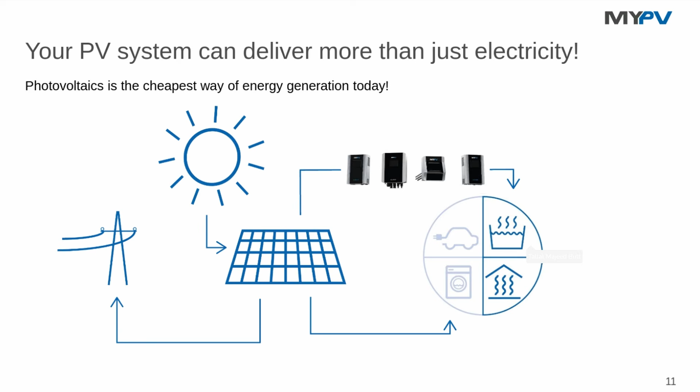For example, you can do domestic hot water, or you can do electrical space heating. So there are different options to use PV in different segments, and that is the topic for today, how you can use PV power for heating applications. So moving further, where is the right choice for my-PV products?

This is a single family home energy chart, which is roughly calculated for European houses. And here is a comparison between old buildings and new buildings. In the new building, the energy demand is relatively equal for each segment, meaning domestic hot water and space heating are roughly equal, because the building itself is a passive building, a low energy building, so it needs low demand for space heating.

So yes, here you can do both applications with my-PV products. You can do electrical space heating, infrared panels, night storage mediums, etc. You can do both domestic hot water as well as space heating.

Then the question comes on the old buildings. In the old buildings, even where I'm living is an old building, your energy demand is really high. In that case, it's only recommended to do domestic hot water with the my-PV solution. Technically you can do space heating, but your power from photovoltaic will never be enough to meet that high demand.

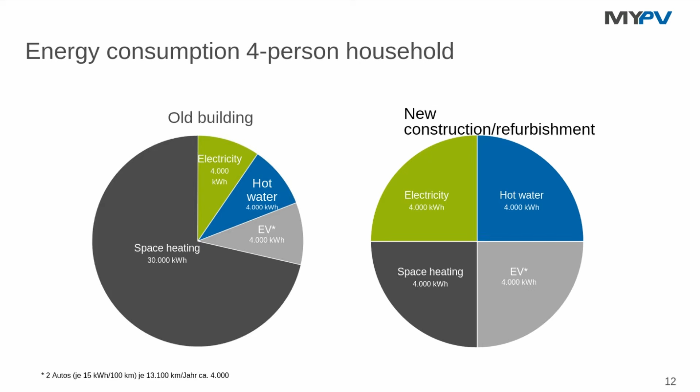So the point from this slide is, in new construction, in modern buildings, you can do both space heating as well as domestic hot water. But in the case of old buildings, it's only recommended to do domestic hot water.

And our concept is pretty simple. When it comes to heating demand, you are always taking external sources: that can be power from the grid, gas, oil, or pellets. What we are saying as a company, as my-PV, is during the day, use as much power from the sun as possible for heating up the water.

And during the night, you can use power from the grid. Even with our devices, you can take power from the grid as well. So there are different options to combine photovoltaic together with grid power and external sources for heating up the water.

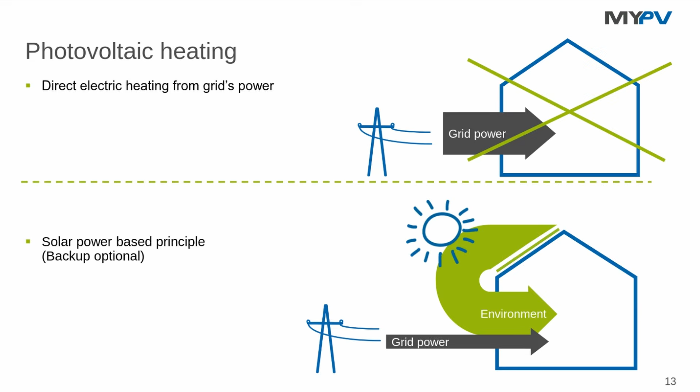When it comes to storage for PV, the number one idea is the battery. With a battery, you can store energy. But comparing it at 5 kilowatt-hours, the battery is still expensive and requires a huge capital cost. What we are saying is that you can store more energy in your boiler, in your tank, in the cylinder of a 300-liter boiler. So you can store more energy at less cost.

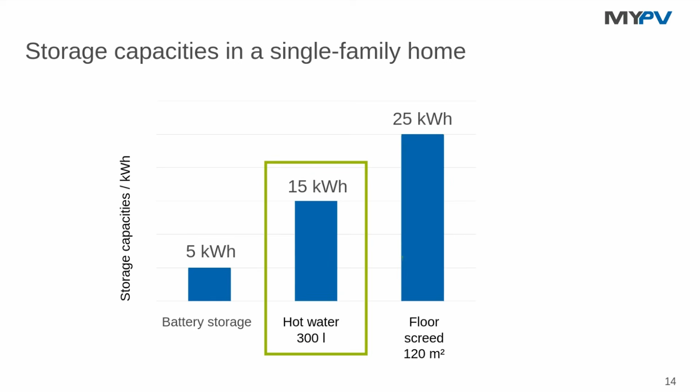So you can store more energy with less investment. But nevertheless, our systems are also compatible with battery storage as well, which we will be explaining in this webinar, as well as with the Loxone system and how it works. So Dennis will also highlight those things as well.

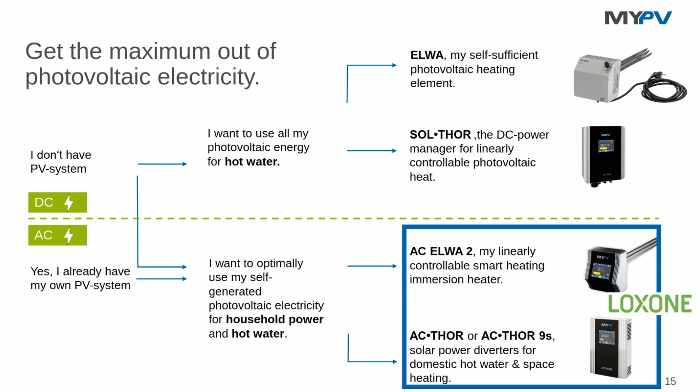So now we discuss which products we will be discussing today in this webinar. We have a relatively small portfolio divided into DC products and AC products. DC products are directly connected with the PV, but those are not the topic for today. Rather, the topic of today is the grid-connected PV system and products that are compatible with the Loxone system, so how our AC products can be integrated together with the Loxone management system. There we have two products which we will be discussing in this webinar today.

So as we are preparing with products, we need to know as a background why to choose MyPV, why you need to do domestic hot water from PV. There are a number of reasons. For example, the hot topic, especially in Belgium, in Flanders, is that when you are exporting your surplus power, you cannot make money out of it. So you have a low feed-in tariff. You are exporting your surplus power and getting nothing from that, so it's rather better to use that power in your house.

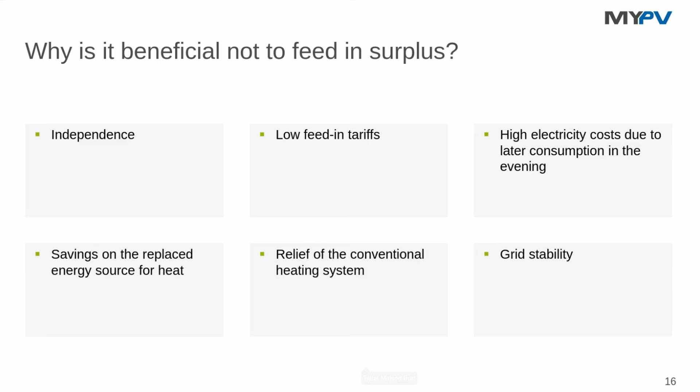Other reasons, for example, in the Netherlands, you have net metering, which is coming to an end. Likewise, you need to pay grid fees as well when you are exporting surplus power above a certain limit, so you need to pay for that surplus power as well. Other reasons: there's more and more PV power in the grid, and that's causing problems for the grid operator. There can also be gas prices, because that was the case, let's say, 2 years ago when gas was quite expensive. That can be a reason to get independent from those sources.

So what is the concept behind MyPV? What are we doing as MyPV? In terms of our products for grid-connected PV systems, you have PV panels, then you have a PV inverter, and that PV inverter is producing the power at the house. You are using that power at the house, and there comes a time when there's excess power. That excess power either goes to the battery, in the case when there's a battery, or otherwise it is sent to the grid.

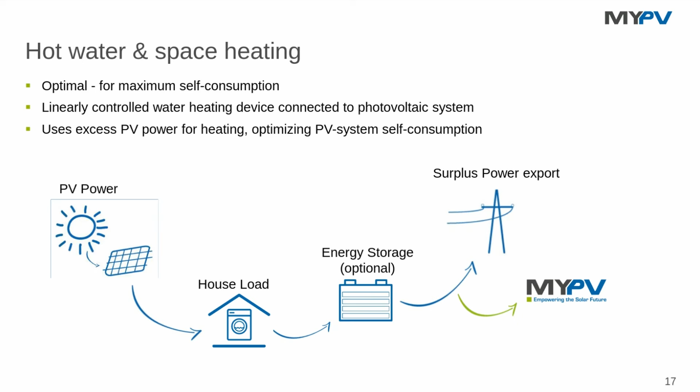What we are doing is reading that surplus power information and diverting that power exactly to heat up the water or heat up the home. That can be a heating application, I would say. So this is the concept: we are using precisely the surplus power which is meant to be exported to the grid. Rather than exporting it to the grid, we are using that power for heating applications. As I said, we have different products for that. We have the AC ELWA 2, we have the AC THOR, but let's start with the AC ELWA 2.

So this is a smart heating element. What it means is that, as I said, you have a PV system, and together with Loxone, we are getting the information about how much surplus power there is. The master of the system is of course Loxone in that case, and we are getting the information about how much surplus power there is.

The story behind our smart heating element is that we are doing linear power control. What it means is that the power at the feeding point is continuously changing because somebody is turning on lights. Even the production from the PV is continuously changing, and we are reacting to that information very precisely. We are reading that information one time per second, so you can imagine how precise we are. And every surplus watt is sent to heat up the water.

So that's a feature which is, I would say, unparalleled, because there are other solutions, clearly, with relays, etc. But we are not doing on and off. Rather, what we are doing is linear power control, which means that we very precisely send that power to heat up the water. And what further comes with the Loxone system: of course, they have their own ecosystem, and we can be inside that ecosystem where Loxone can prioritize the system.

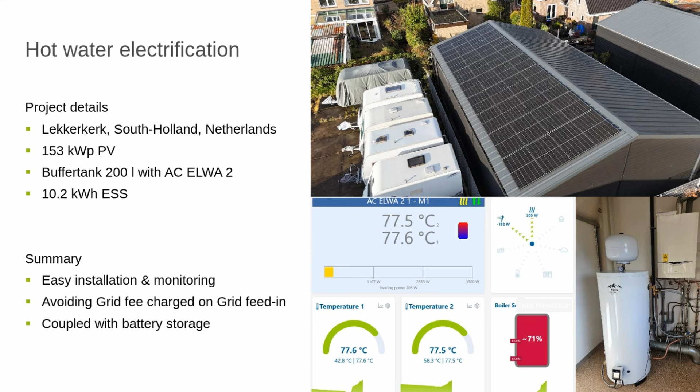What it means is that, because even in his system he has a battery, once the battery is full, then that power is diverted to the 200 liter boiler. So together with that he improves his PV self consumption, and that you can also visualize on the web interface, even on the display as well. So that's just a small reference from the Netherlands, I would say.

Again, some emphasis on PV self-consumption, because this is a relatively important topic in the market, becoming an important topic. The reason, for example, if we are taking a relatively average system of 6 kilowatt, your PV self-consumption is really in the level of let's say 30%, and yes, you can increase your PV self-consumption with a battery, but that comes at a capital cost. What we are saying is that yes, you can increase your PV self-consumption with my PV.

In this black one, you can increase PV self-consumption up to 80% with my PV solution. But nevertheless, our system can also be combined with a battery as well, and you can achieve higher PV self-consumption.

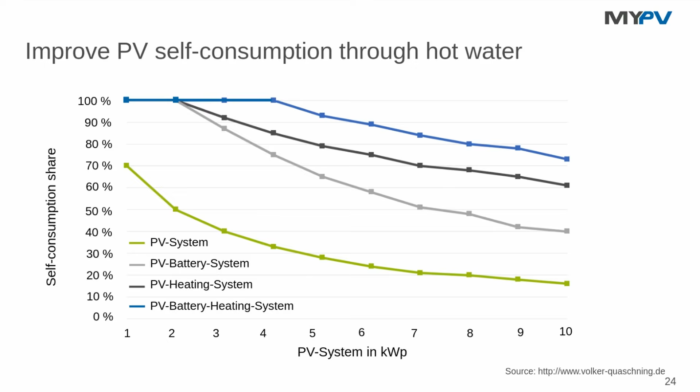How it works with the battery system is that generally our recommendation is, let's take an example of a PV day chart curve. Till afternoon your battery is full, completely full, and then you have surplus power. Once you have surplus power, then we start diverting it.

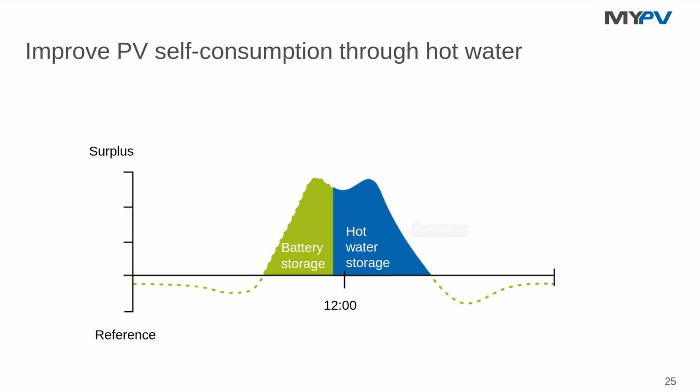Into thermal storage. Sometimes customers ask, could they do thermal storage first and the battery later? Yes, you can do that as well, but the recommendation is to do battery first, because what you put inside the battery, you can get back, but in the case of a boiler, you cannot get that power back.

In terms of a planning tool, we have our own planning tool. We call it my PV Power Coach. This tool is free of cost, and it can be used for your sales and technical discussions.

What is on this tool is that you have a PV system, so you put in different parameters - for example, how big your PV system is, the feed-in tariffs, electricity tariff, how big your boiler is, and how many people are in the house. There are also locations from Netherlands, Belgium, and different regions.

What comes out of this planning tool is that you can calculate and estimate the savings you can make in one year, and what your payback period will be. This is a free of cost tool - you do not need to make any registration, and it's highly recommended for your sales discussions. The link is already in the slides, so this can connect you with the planning tool.

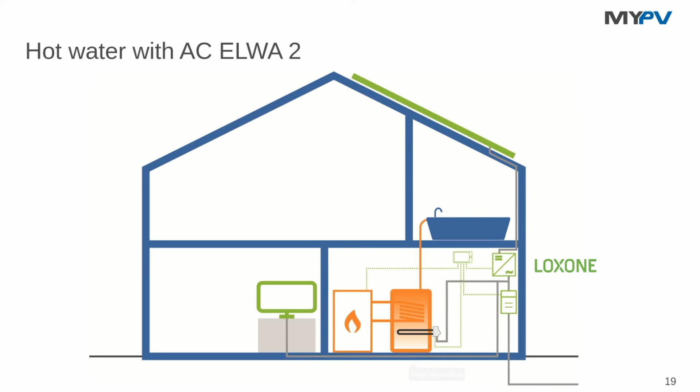But in many cases, there's already an existing immersion heater, so in that case the AC ELWA 2 doesn't make sense. The AC ELWA 2 makes sense when it's a buffer boiler, or there's a boiler that doesn't have an immersion heater - then it's recommended because it's much easier, everything is together and you plug it in and run it.

But in the case of AC THOR, it gives you more flexible options. What it means is that you can connect these power managers, these solar power diverters, with the existing heating element, plus you can do electrical space heating with them.

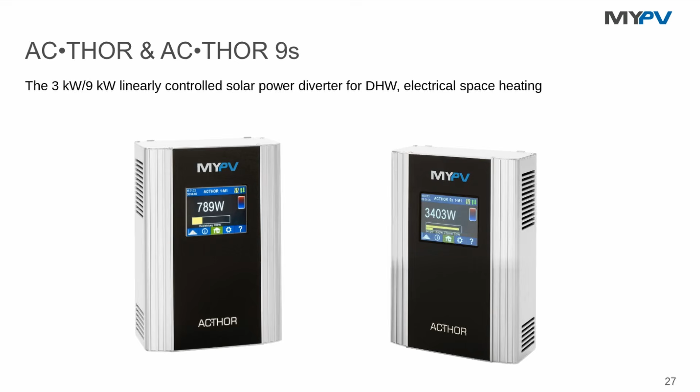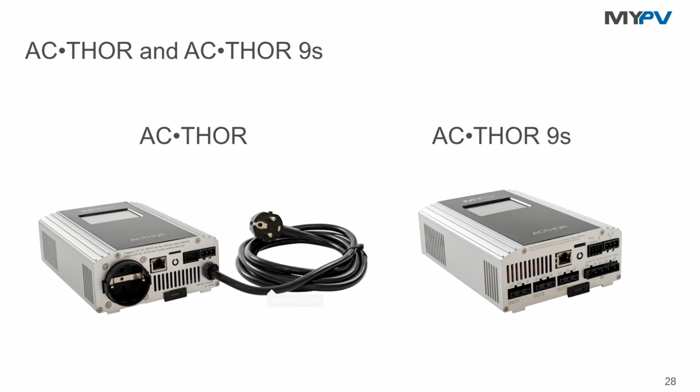There are two variants in the case of AC THOR. On the left, you can see the single phase variant, which can do linear power control from 0 to 3 kilowatts. On the right side, it's the same box but with higher output, that can do linear power control from 0 to 9 kilowatts. So we have a three-phase variant and a single-phase variant, depending on how big your PV system is.

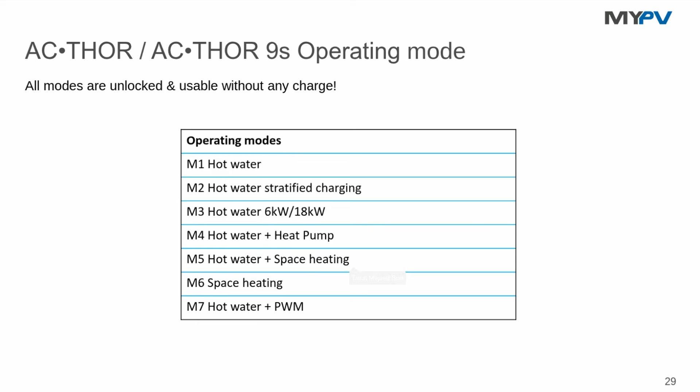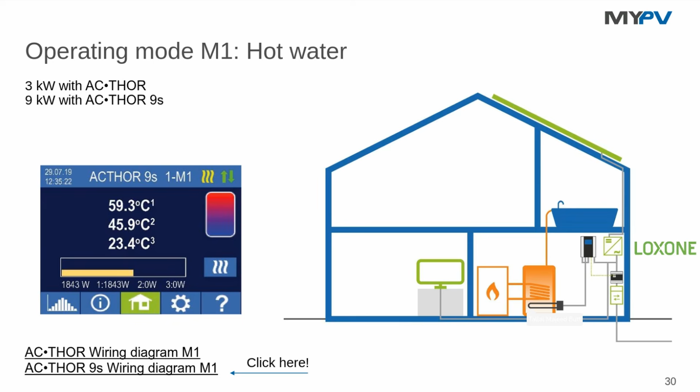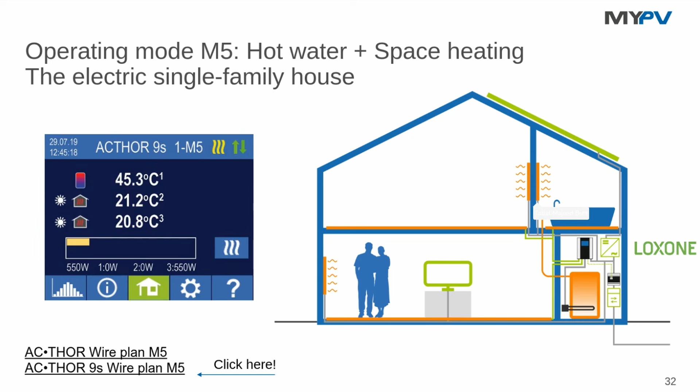You can also put these heating elements at different levels of the boiler, or connect to different loads as well. For example, in mode 5 - I would emphasize that this space heating is generally recommended for passive houses with low energy. Here one output is connected to your heating element, a second output is connected to your electrical floor mats, and the third output is connected to an infrared panel, for example. You can optimize the temperature individually for the boiler and for the room, and there's no problem doing that.

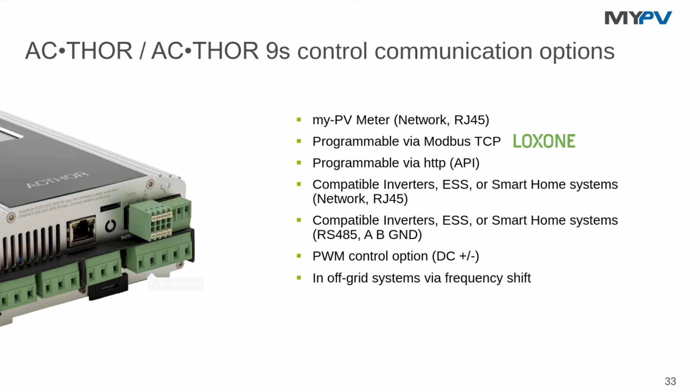In terms of communication, it's more or less the same with the Loxone system. We are communicating again via Modbus TCP with Loxone, and everything is plugged on. You do not need to open a terminal box - everything is just plug and ready to be played.

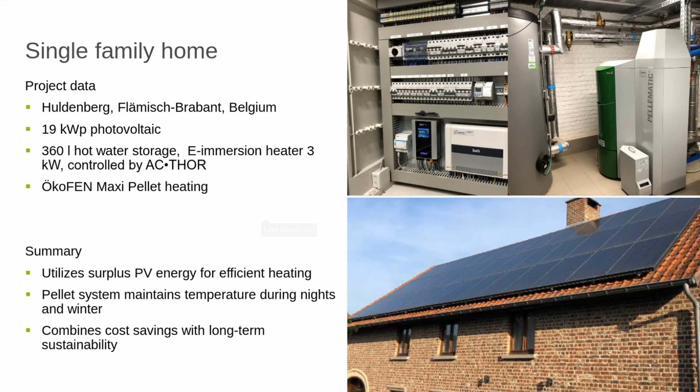Let's discuss some interesting case studies from AC Thor. This is quite an old, early adopter of my PV in Belgium, with a different scenario. In this case, it's a single family home with a PV system, plus the user has pellet heating as well. During the daytime he uses power from the sun to heat up the water, and during the night time the pellet heating kicks in to maintain the minimum temperature. So it's a sustainable project with savings that helps him save on environment and on pellets.

Interesting case, I would say, with Loxone - here it's a multi-generation home. The building is completely covered with the PV system. I would say it's a special case project because normally you do not see a big PV system on a building like this, but in this case it's a 144 kilowatt PV system, and the user has been using multiple AC Thor 9s.

So he's immensely heating a 100,000 liter boiler. The reason to do that was that the water, or the PV, or the sun is used during summer to store energy for the winter. So the temperature goes up to 95 degrees in the boiler, which you can see is a big boiler.

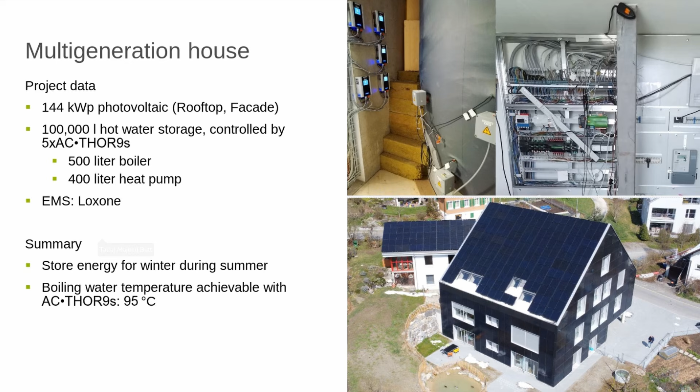Together with Loxone, we are optimizing the system. For example, there's a heat pump and there's a my PV system. The heat pump kicks in when there's obviously no more PV or no more hot water available in the boiler. But the idea is to increase the PV self-consumption, and he's able to use that power during winter time, which was stored during summer application.

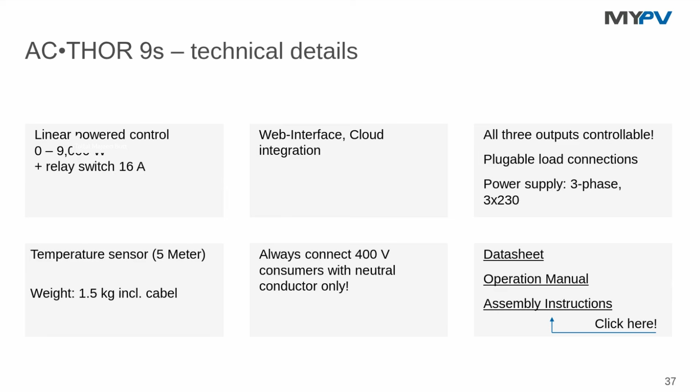Some technical things on the AC Thor - it is supplied with a temperature sensor, so everything is included. You do not need to buy anything extra with the AC Thor. In case of the AC Thor 9s, as I said, it has more power capacity, up to 3 phase.

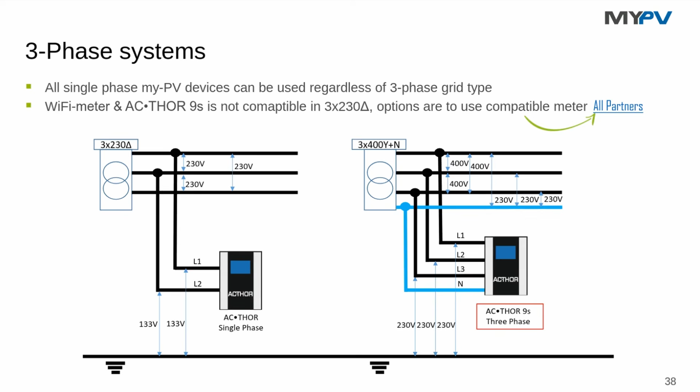One thing which might be important for Belgium is that our 3 phase product cannot be used in a delta grid. What it means is that there are some cases in Belgium where there's no neutral. So without neutral, you cannot use our 3 phase product. But what you can use in that case is our single phase product - so you can use our single phase AC Thor, or you can use the AC Elwa 2. But you cannot use the AC Thor 9s in a delta grid. So that's a thing you need to take care of during installation.

Okay, thank you for the introduction into the MyPV products and what products can be used for what topics about storing hot water in systems. For now, I will highlight a little bit about the Loxone part and what we can do, because you told us you are great at managing the PV production for the hot water system.

But as you already explained, mostly we don't only have hot water in an installation, we have battery, we have a lot of other energy users in an installation, and there we come in as Loxone, trying to do an energy management of not only the hot water but the whole installation. Here I'm going to take you a little bit through the energy management topic and how we can integrate MyPV into this energy management system. So here we first start with the topic about Loxone.

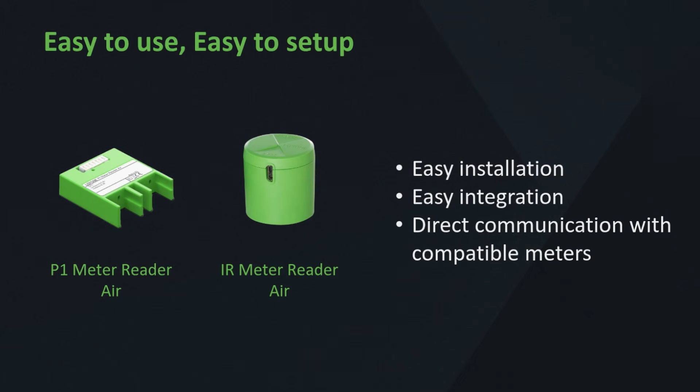This is basically because if we have the analog meter, then our grid is the battery, and then it does in most installations not make sense to do a lot of energy management, because everything we produce we put in the grid and we just take it out when we need it. That's the basic form of energy management. But from the moment we go to a digital energy meter, then this stops and we have to pay for all the energy we use, and we get not a lot of money back from the energy we put into the grid.

Also, when we are looking at installations where we don't have this digital meter, especially in the Netherlands, maybe some meters are not compatible and so on, then we have our energy meter 3 in one-phase and three-phase systems. We talked a little bit about the delta grid. If we want to use the energy meter 3-phase in a delta grid, it is not a problem. This device is compatible for all grids. So we can easily do this. This is also MID certified, meaning that we can use it for billing purposes, especially in larger scale projects.

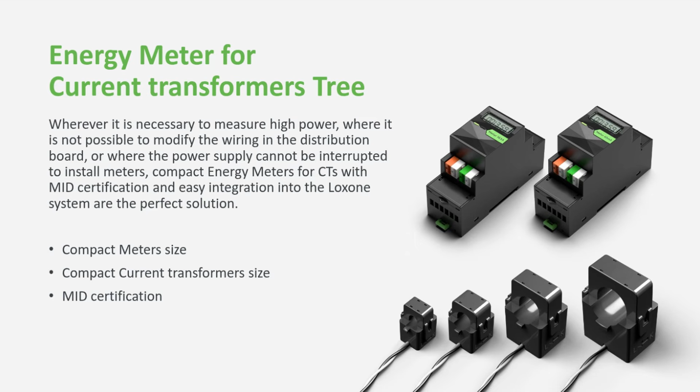Then since a few weeks ago, we have also our energy meter for current transformers. This device was really needed because then we don't have to be invasive into the system to get the energy usage we are trying to look at. Also MID certified, and we have meters from 25 amps up to 400 amps, meaning that if you have bigger scale projects where you are not able to disconnect the power lines, but you want to do an energy management, then this meter is very interesting to use in those installations.

Also, if we want to look at other devices in an installation to look at the energy consumption of this, we can easily use a smart socket air to measure devices like televisions or the washing machine or the dryer and so on. So we can get a basic understanding of where the energy is going in an installation.

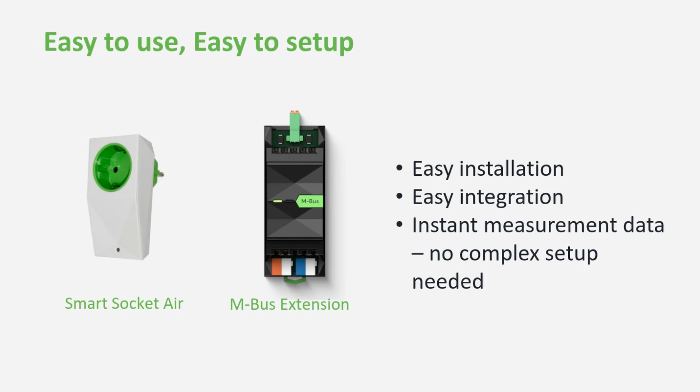Also, we talked about gas systems. It's also sometimes interesting to have a look at. That's why we have the M-Bus Extension, where we can integrate a lot of meters that are already in installations to get also back into the energy management system to have an overview of what energy is used where and when. So first we have to evaluate this. That's the basic start of an energy management system, is to look at where is our energy going and when.

Then the first part of energy management is reducing the base load. If we see this base consumption and we look at the building and we see it is constantly using 500, 600 watts of energy, we have a small family home, then I say, wow, this is a lot of energy. Where is this all going? And how can we reduce this base energy load? That is the first part, is to get this base energy down.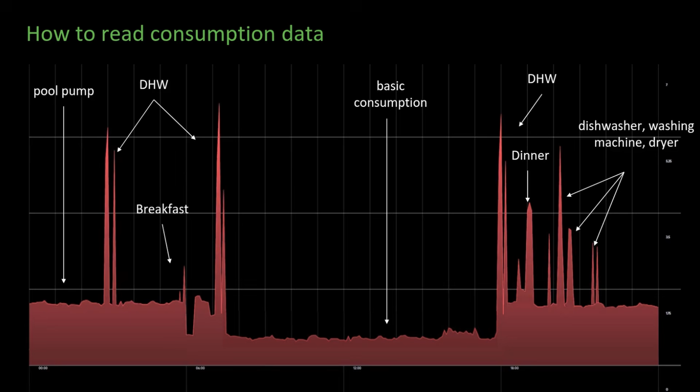As far as I know, in Belgium and in the Netherlands, when it is night, the sun is not shining, our energy system is not producing energy. So I cannot switch the peaks to the day before, because this is when somebody will shower. And then, yeah, sorry for the rest of the family, but the water is gone. So it is not always possible to put the whole domestic hot water situation into the PV part.

So then we are looking not only at PV, but we are looking more to the spot market, where if a customer has a dynamic tariff, this is also included in our software, meaning that if the customer has this contract with his energy supplier, he can just basically also integrate this into our energy management system.

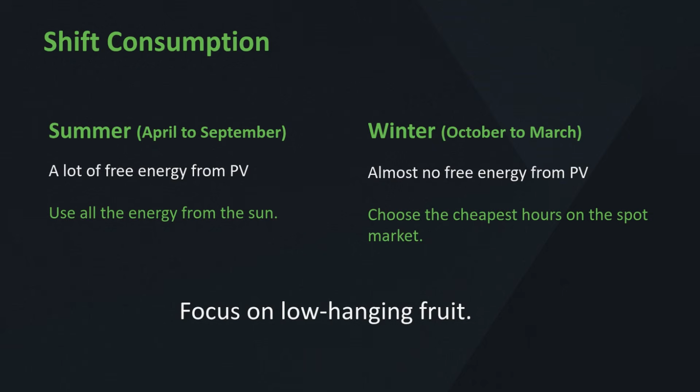So we are trying to shift. During the summer, we have a lot of PV, but yeah, I'm looking at today. It is a nice day. It's not that cold outside, but it was not a great day for PV in Belgium. So yeah, we need this hot water, because otherwise we have a cold shower this evening. So during the winter, we try to use the energy management system not only for self-consumption of the energy system, but also trying to have the needed energy available at the lowest cost.

So basically, when I look here, we shift the domestic hot water, we can shift the pool, we can shift this peak also to the day, because after this the family leaves, so the boiler does not need to produce extra energy. We can just wait a little bit, and we try to use it as effectively into the PV system based on the priority the customer is giving.

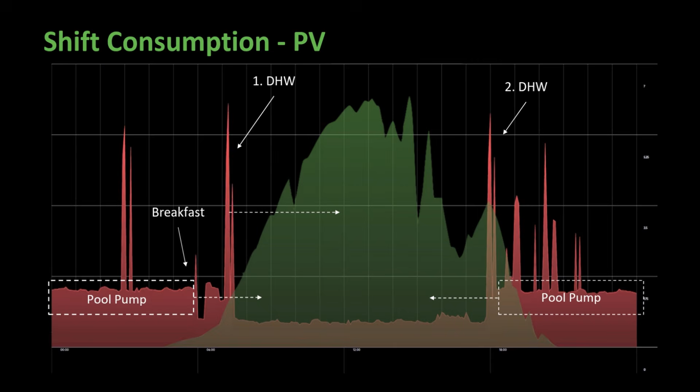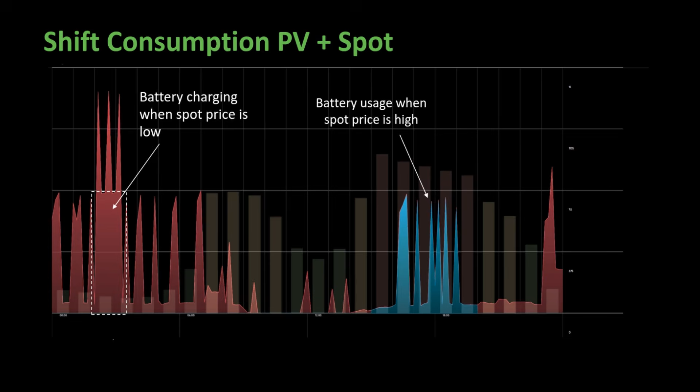And then we come into these integrations, because yes, we have a lot of energy meters as Loxone. We have a lot of lighting, we have a lot of audio, we have a possibility to charge your car using our wallbox. But what we don't have is a heat pump. What we don't have is electrical elements to get domestic hot water. And then we have to look at the integration, where we are now looking at the integration with MyPV. We saw that they have a Modbus TCP connection.

So if the MyPV is connected to the same network of the installation, we can integrate the MyPV system over Modbus TCP. If we have an installation where the network is not suitable for integration of the smart building control systems, MyPV also has the possibility of the Modbus RTU interface, and there we also have the Modbus Extension and the Modbus Air, so we can integrate using the network connection or using a hardware bus communication interface, where we are network independent in an installation.

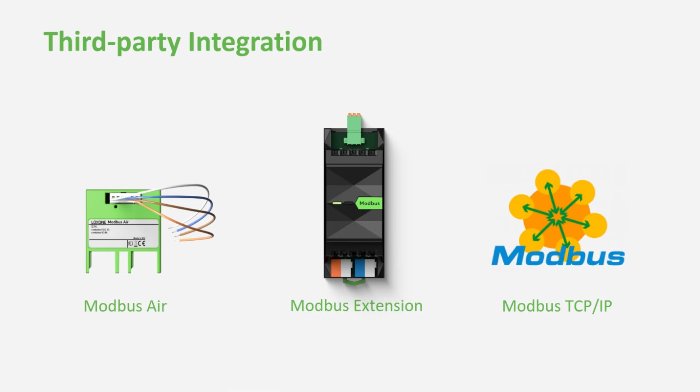So this is where we are looking, and then I'm going to share my screen to have a little bit of a look into the Loxone system.

So we talked, or Talal showed us the Loxone library. If we go to the Loxone library, we can search MyPV, and there we can find that MyPV also did some work there and already made the templates available for their integration. We talked about the ELWA tool. We can find this Modbus integration here.

We talked about the AC THOR system. We can find the integration here. And we see that this template is also done by MyPV. So basically, this shows that MyPV is also aware of the integration between Loxone and their system. And this is, to an installer, I think, a very nice and important topic to know.

Because if there is a question, Loxone can answer this question, but also MyPV can answer this question or direct you to the correct person at Loxone, or we can direct you to the correct person at MyPV, so you get the best information necessary for your project. If we go into this library, this is not only a template where we say, oh, here are a lot of Modbus registers, good luck. Here is the software, do whatever you want.

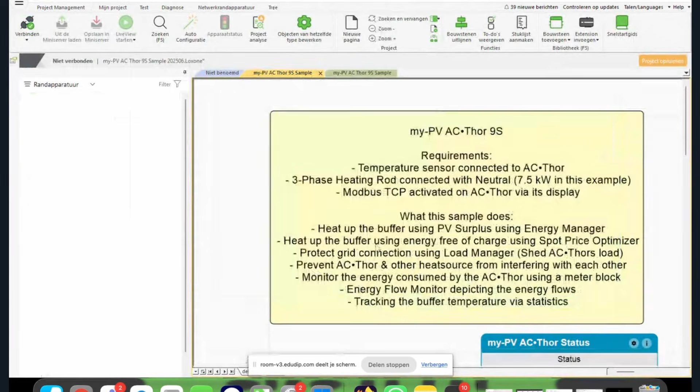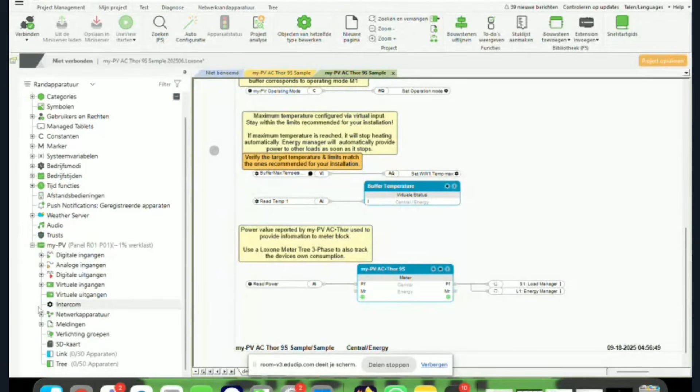I see my config file is not opening at the moment, so I'm opening it again. Here we see the configuration. So we see an example of MyPV where a lot of explanation is made. We also see a lot of configuration in this example. So we can find the MyPV system here. We see that they provide sensor data. We see that they provide electric data. And there we are controlling the power to the MyPV system.

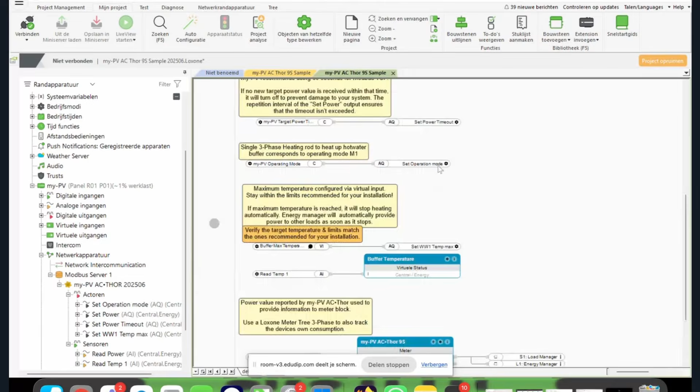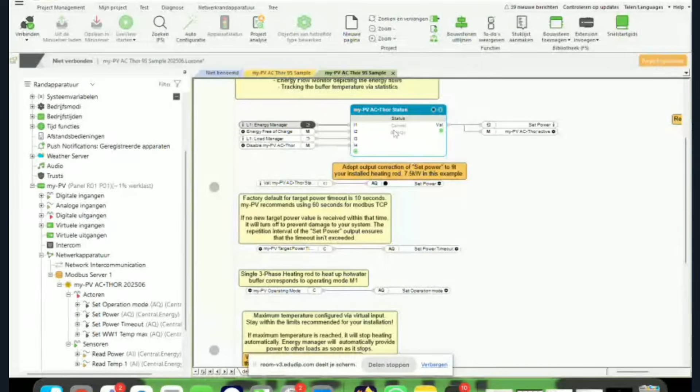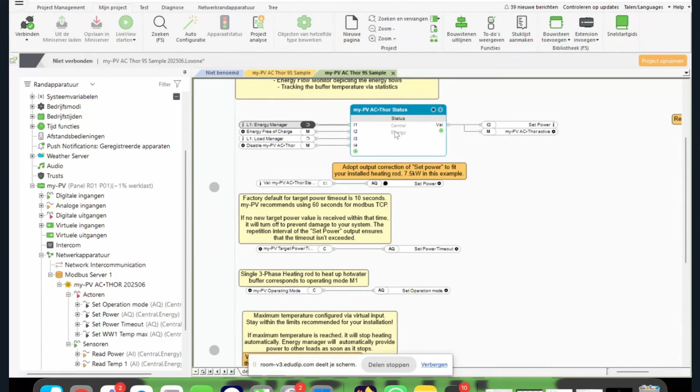We see this also. This is calculated depending on if we are using our load manager for the 15-minute peak interval, for example, or if we are using energy management mode, or if we are using dynamic spot tariff mode. The status block is controlling what energy we are sending based on the priorities of the installation, if it is energy management, if it is spot price, or if it is load protection or 15-minute interval, for example. There we are sending the correct information to the my-PV system.

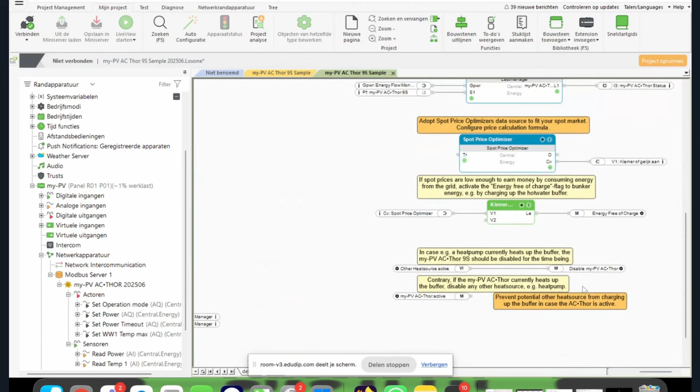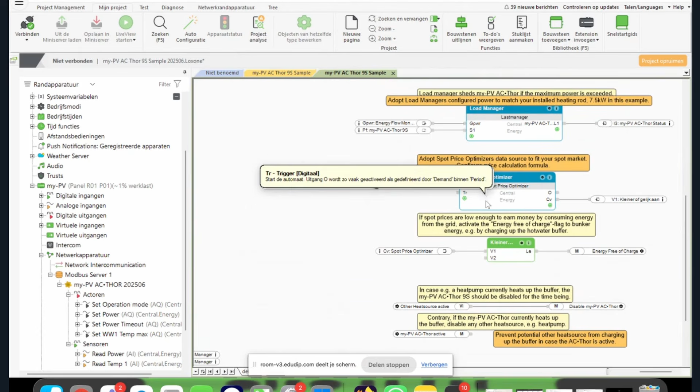Here we also see the energy management, where we can integrate this so the customer knows what energy is used. We have our spot price optimizer, which gets the hourly tariffs from the market, so we can use this hourly tariff information for charging our domestic hot water.

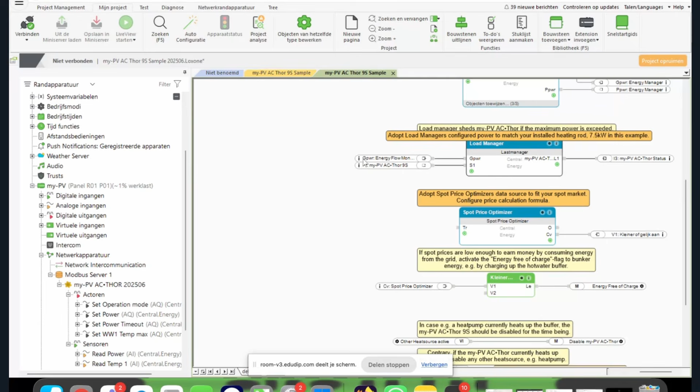We see our load manager, which is looking at the grid information and trying to balance our grid connection so that we are not tripping a breaker in the installation, or for the Benelux or the Belgian market, so that we don't go over this 15-minute interval, for example, where we have to pay an extra fee for our grid connection. This we can do with our load manager. And then we also have our energy management. Here we have a specific use case only for my-PV.

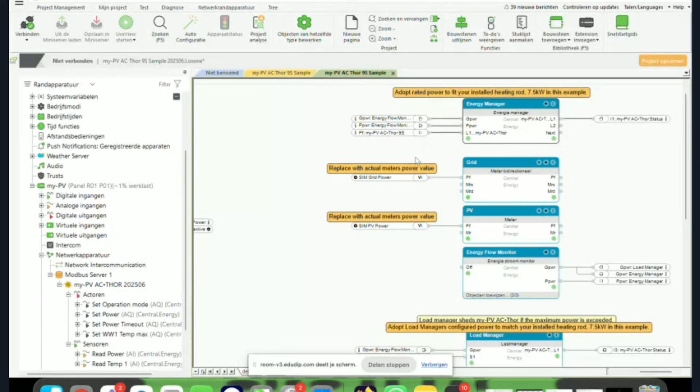If you go on our website, we have more explained topics where we not only take the domestic hot water, but we take a lot of energy management examples and try to integrate this into one system. This is what our energy manager does. So we have here a basic config example, which is already made, so that you can easily take this as a guideline and just integrate this into your installation, where you don't have to reinvent making hot water, so to say, but you can use a predefined example and customize this based on the needs of your installation.

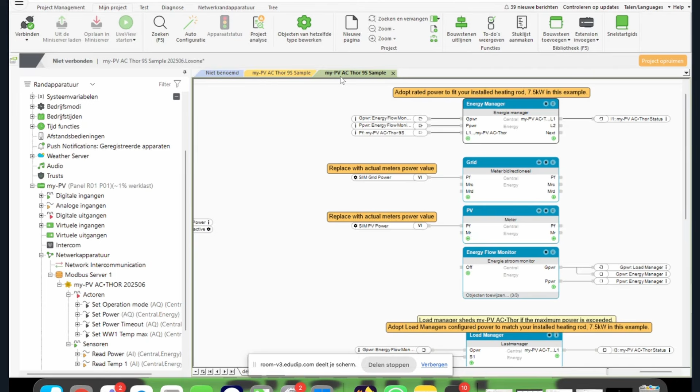This is very fast, very quick, because I had to look at the time, so that we don't go over the time. I just want to give you one extra look at what is coming in the next software release. We are looking at spot market, we are looking at PV production, and now we are making a building block for the PV production, where we are going to look at what weather is predicted tomorrow, so we can more dynamically say, okay, we are going to charge our hot water during the night, because today there is not a lot of PV, so we have this on the lowest tariff possible.

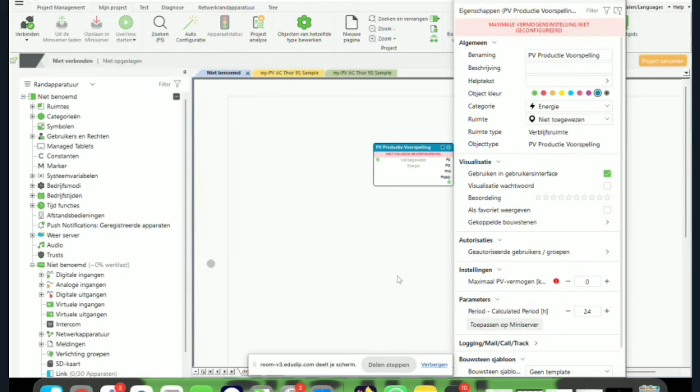This is based on the calculation of the PV system you have in your installation. The only point of information that you have to give is the maximum theoretical power delivery your system can give. Based on our weather service, you get the calculation for the period that you defined in this building block. This is currently in alpha testing, as we have to say it, and will be available in the next software release for everybody to use.

Then I'm going to stop sharing my screen. And we are going back to the presentation, where I am going to hand the presentation back over to Talal, if he is here. Can you hear me, Dennis? We hear you. Can you hear me? Perfect. Yeah, unfortunately I had to change the room, but I'm still here.

So I think that was quite amazing with regards to the library and all that stuff. I feel very informed about how many options the Loxone system has. But anyhow, let's come to the end of the webinar for today.

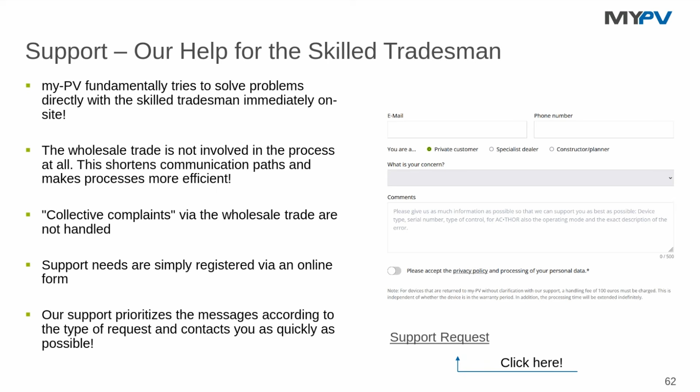So we are at the end of the webinar today. I think it was quite a lot of information in a short span of time, so I assume you cannot get everything out of it, but the main idea from our side is that we react to the information from the PV power, and the core competence from our side is the linear power control. So that's a strength. And then you have the strength combined with the EMS system from Loxone.